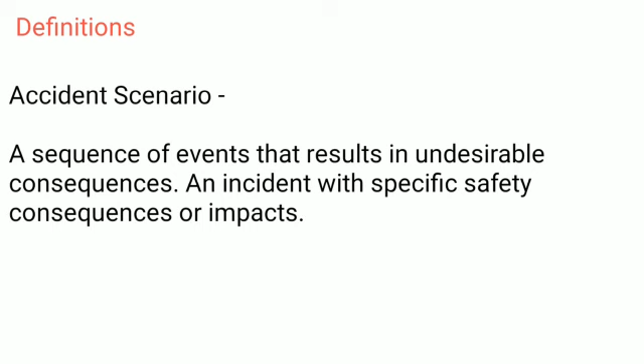Definitions. Accident scenario, a sequence of events that results in undesirable consequences. An incident with specific safety consequences or impacts. Administrative control, a procedural requirement for directing and/or checking engineered systems or human performance associated with plant operations.

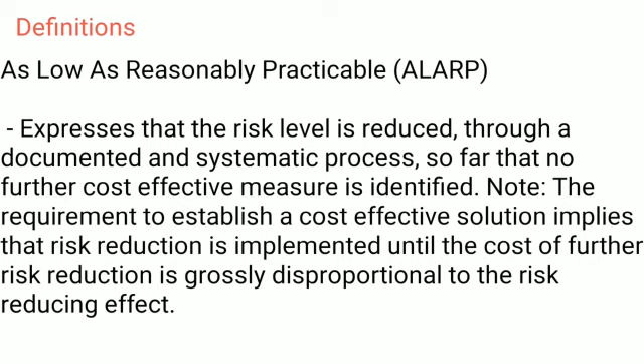As low as reasonably practicable, ALARP, expresses that the risk level is reduced, through a documented and systematic process, so far that no further cost-effective measure is identified. Note, the requirement to establish a cost-effective solution implies that risk reduction is implemented until the cost of further risk reduction is grossly disproportional to the risk-reducing effect.

Best practice. In the context of these guidelines, best practice refers to standards, procedures for controlling risk above the level provided by the application of good practice. Consequence. The direct, undesirable result of an accident scenario usually involving a fire, explosion, or release of toxic material. Consequence descriptions may be qualitative or quantitative estimates of the effects of an accident in terms of factors such as harm to people, economic loss, and equipment damage.

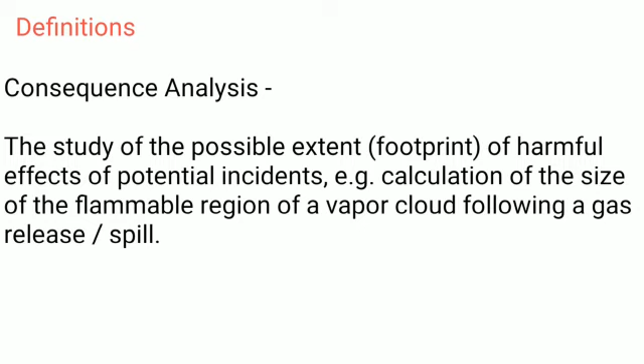Consequence analysis, the study of the possible extent, footprint, of harmful effects of potential incidents. For example, calculation of the size of the flammable region of a vapor cloud following a gas release, spill. Event, an occurrence related to equipment performance or human action, or an occurrence external to the system that causes system upset. In this document, an event is either the cause of or a contributor to an incident or accident, or is a response to an accident's initiating event.

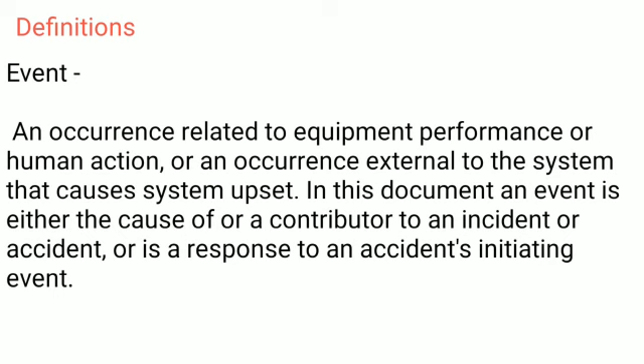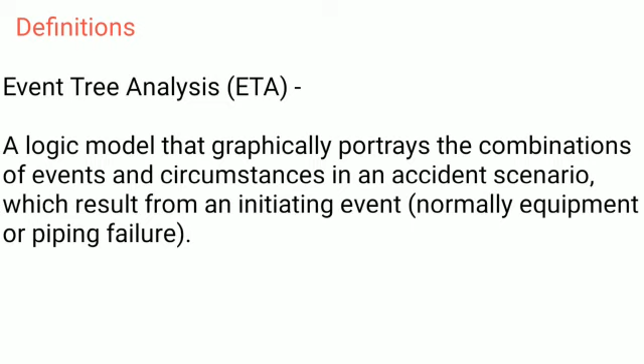Event tree analysis, ETA. A logic model that graphically portrays the combinations of events and circumstances in an accident scenario, which result from an initiating event, normally equipment or piping failure. External event, event external to the system, plant caused by 1. A natural hazard such as earthquake, flood, tornado, extreme temperature, lightning, etc., or 2. A human-induced event such as aircraft crash, missile, nearby industrial activity, fire, sabotage, etc.

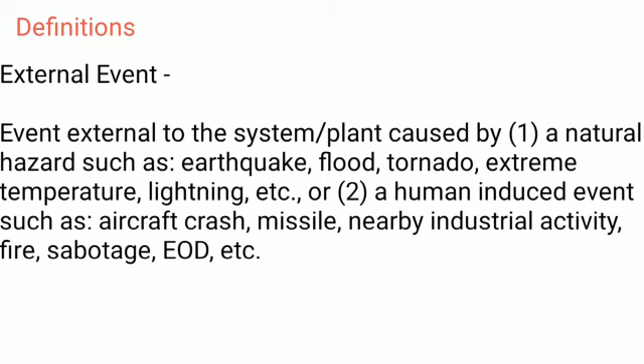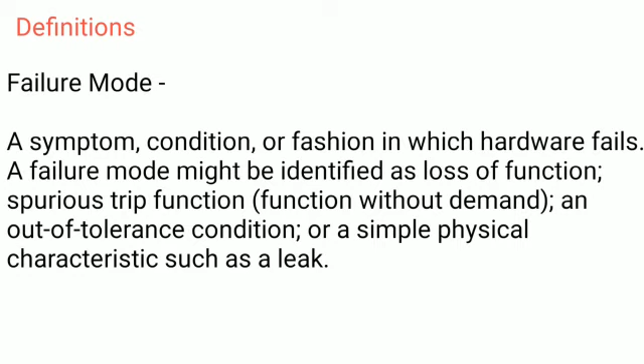Failure mode, a symptom, condition, or fashion in which hardware fails. A failure mode might be identified as loss of function, spurious trip function, function without demand, an out-of-tolerance condition, or a simple physical characteristic such as a leak. Failure modes and effects analysis, FMEA, a systematic, tabular method for evaluating and documenting the causes and effects of known types of component failures.

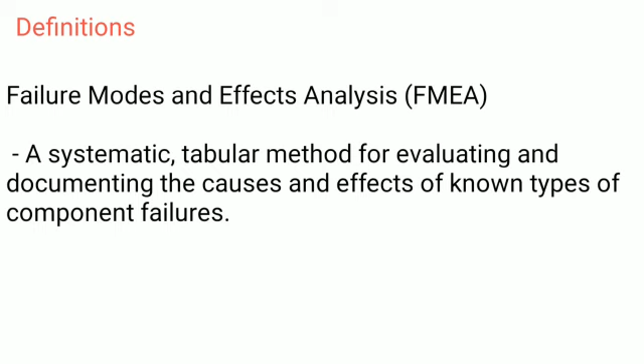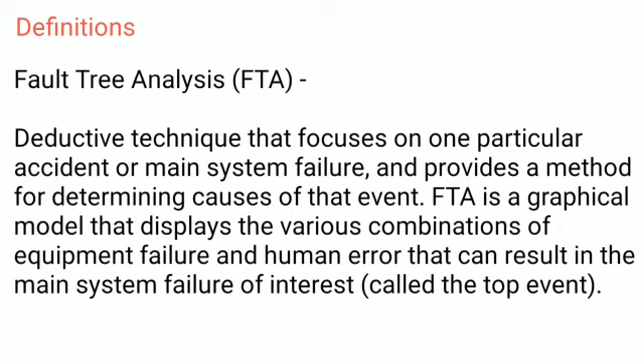Fault tree analysis, FTA, deductive technique that focuses on one particular accident or main system failure, and provides a method for determining causes of that event. FTA is a graphical model that displays the various combinations of equipment failure and human error that can result in the main system failure of interest, called the top event. Frequency, the number of occurrences per unit time, usually a year, at which observed events occur or are predicted to occur.

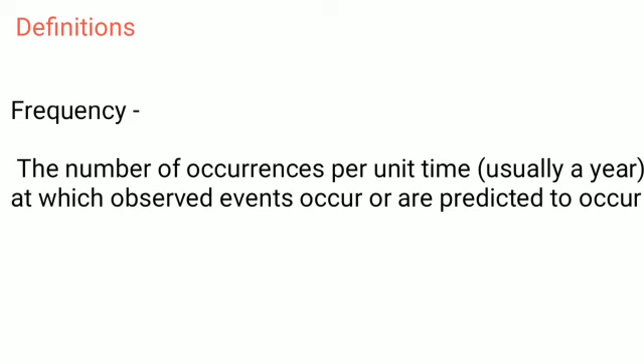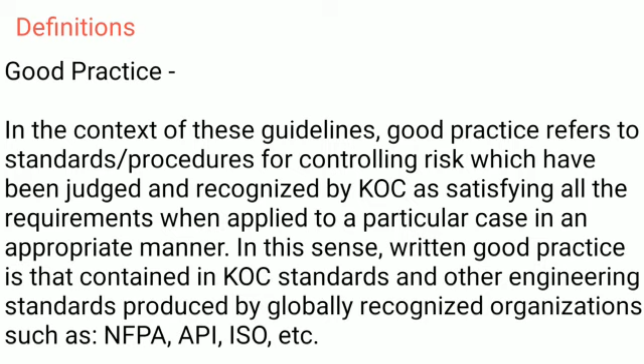Good practice, in the context of these guidelines, good practice refers to standards, procedures for controlling risk which have been judged and recognized by KOC as satisfying all the requirements when applied to a particular case in an appropriate manner. In this sense, written good practice is that contained in KOC standards and other engineering standards produced by globally recognized organizations such as NFPA, API, ISO, etc. Harm, physical injury or damage to health, property or the environment. Hazard, an inherent physical or chemical characteristic that has the potential for causing harm to people, property, or the environment.

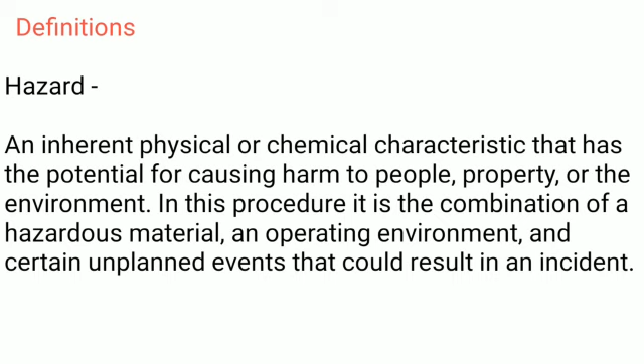In this procedure, it is the combination of a hazardous material, an operating environment, and certain unplanned events that could result in an incident. Hazard identification, the pinpointing of material, system, process, and plant characteristics that can produce undesirable consequences through the occurrence of an accident.

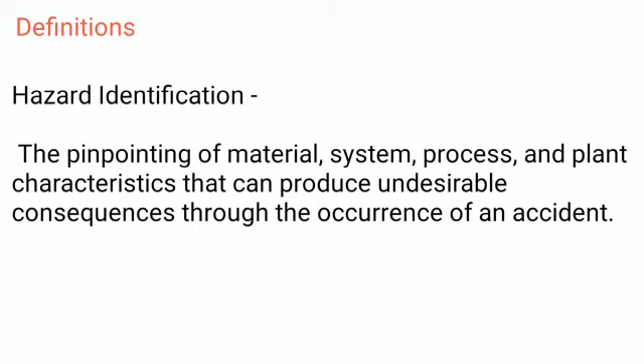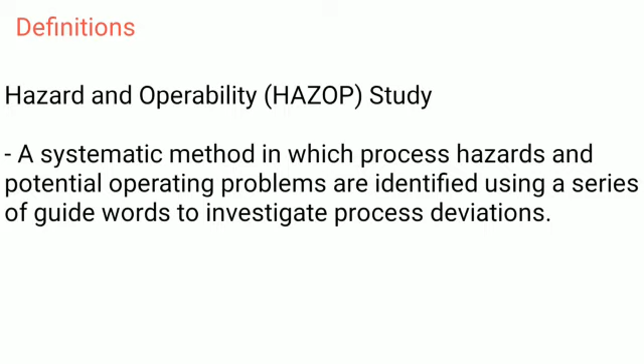Hazard and operability, HAZOP, study, a systematic method in which process hazards and potential operating problems are identified using a series of guide words to investigate process deviations. Hazard checklist, an experience-based list of hazards, potential accident situations, or other process safety concerns used to stimulate the identification of hazardous situations for a process or operation.

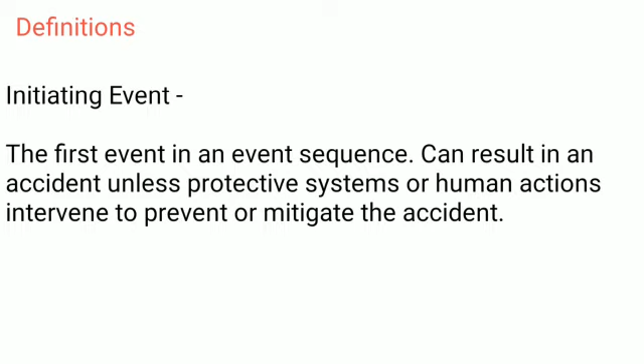Initiating event, the first event in an event sequence, can result in an accident unless protective systems or human actions intervene to prevent or mitigate the accident. Likelihood, a measure of the expected probability or frequency of an event's occurrence. Process hazard analysis, PHA, the analysis of the significance of hazardous situations associated with a process or activity. Uses qualitative and quantitative techniques to pinpoint weaknesses in the design and operation of facilities that could lead to accidents.

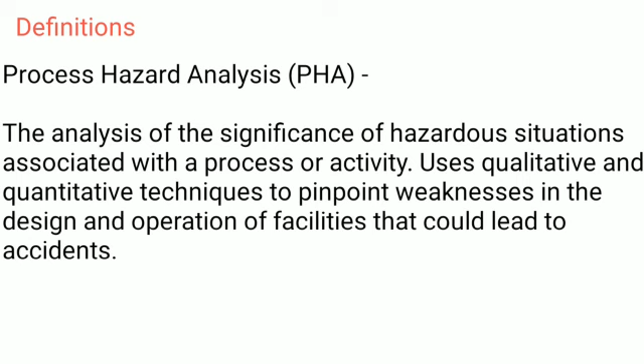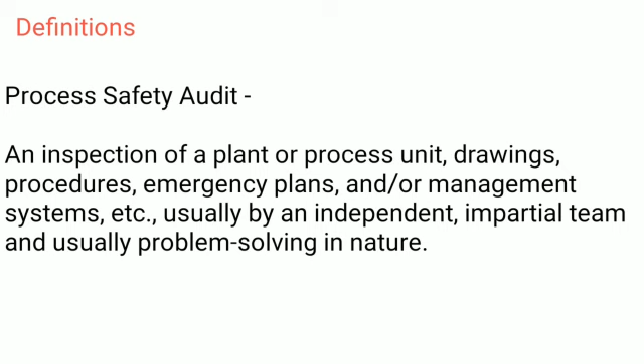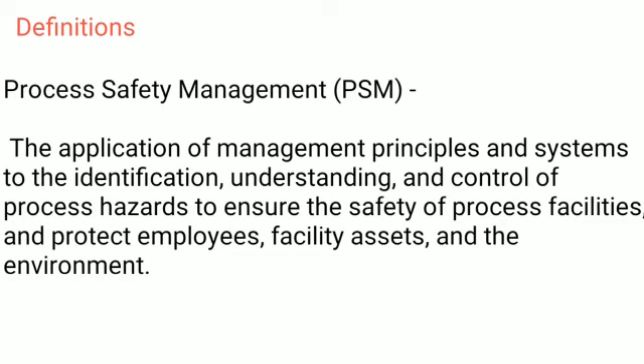Process safety audit, an inspection of a plant or a process unit, drawings, procedures, emergency plans, and/or management systems, etc., usually by an independent, impartial team and usually problem-solving in nature. Process safety management, PSM, the application of management principles and systems to the identification, understanding, and control of process hazards to ensure the safety of process facilities, and protect employees, facility assets, and the environment.

Quantitative risk assessment, QRA, the process of hazard identification, followed by numerical evaluation of consequences and frequencies, and their combination into an overall measure of risk. QRA is based on the application of engineering evaluation and mathematical techniques, ordinarily applied to accident scenarios, and is related to probabilistic risk assessment, PRA, used in the nuclear industry.

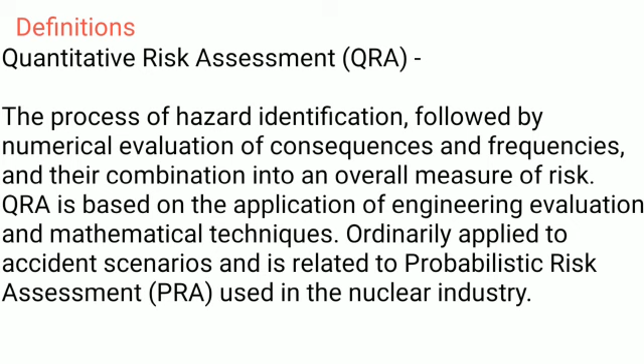Residual risk, the risk remaining after controls have been applied to associated hazards that have been identified, quantified to the maximum practicable, analyzed, communicated to the proper level of management and tolerated after proper evaluation. Risk, the risk associated with an event is defined as the product of the likelihood of the event and the magnitude, severity, of the outcome of that event.

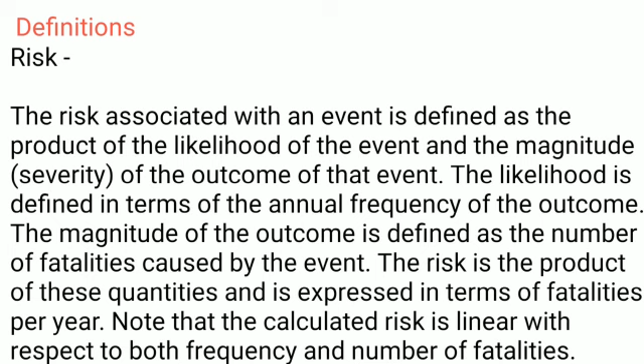The likelihood is defined in terms of the annual frequency of the outcome. The magnitude of the outcome is defined as the number of fatalities caused by the event. The risk is the product of these quantities and is expressed in terms of fatalities per year. Note that the calculated risk is linear with respect to both frequency and number of fatalities.

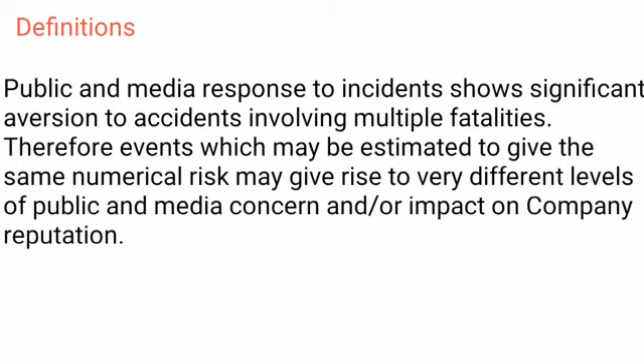Public and media response to incidents shows significant aversion to accidents involving multiple fatalities. Therefore, events which may be estimated to give the same numerical risk may give rise to very different levels of public and media concern and/or impact on company reputation. There are several risk measures which are defined below.

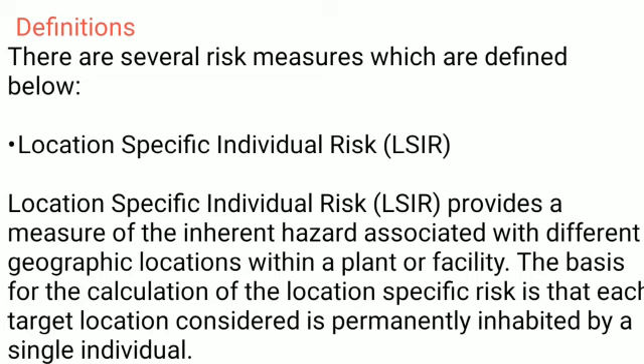Location-specific individual risk, LSIR, provides a measure of the inherent hazard associated with different geographic locations within a plant or facility. The basis for the calculation of the location-specific risk is that each target location considered is permanently inhabited by a single individual. The LSIR is evaluated, typically, at points on an orthogonal grid covering the area of interest. The calculated risks are typically presented as iso-risk contours, which provide an easily understood graphical presentation of the risks.

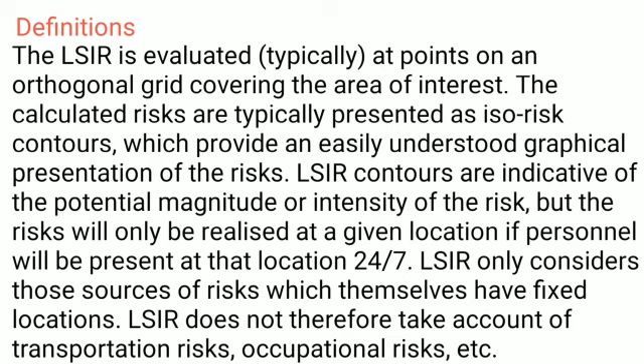LSIR contours are indicative of the potential magnitude or intensity of the risk, but the risks will only be realized at a given location if personnel will be present at that location 24/7. LSIR only considers those sources of risks which themselves have fixed locations. LSIR does not therefore take account of transportation risks, occupational risks, etc.

Individual risk, IR or IRPA. Individual risk, IR or IRPA, is determined on a case-by-case basis for each individual working on a plant or facility. In practice, there is insufficient definition in the data which defines the durations for which people will be exposed and locations at which they will be exposed. Calculations are therefore undertaken for representative work groups rather than for every individual.

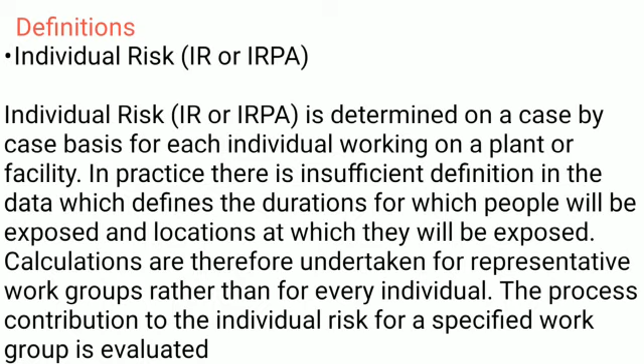The process contribution to the individual risk for a specified work group is evaluated as the time-weighted average of the LSIR values determined at each of the locations at which the work group will spend time. Risk contributions due to transport and occupational risk are also accounted for. Where personnel remain on the plant during their off-shift, risk contributions for this period are also taken into account.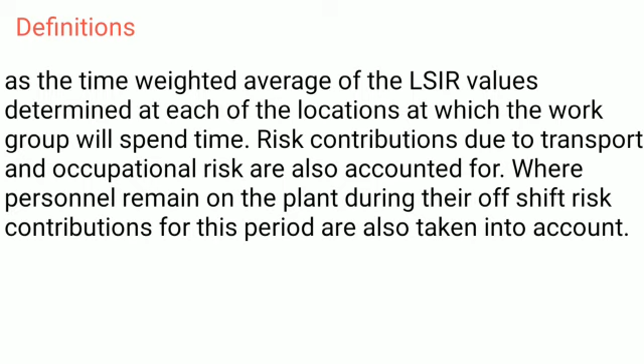Potential loss of life, PLL. Potential loss of life, PLL, is derived from the work group's IR estimates. The PLL for each work group is the product of the work group IR and the number of members of the work group. Where both day and night shifts will be utilized, both will contribute to PLL. Rotations are also accounted for. PLL can be evaluated in terms of fatalities per year, but may also be expressed in terms of total fatalities over the design life of the facility.

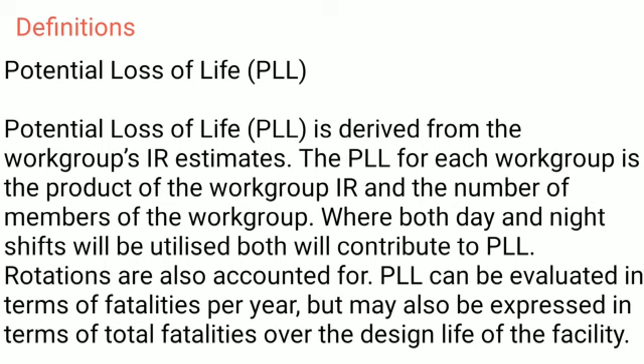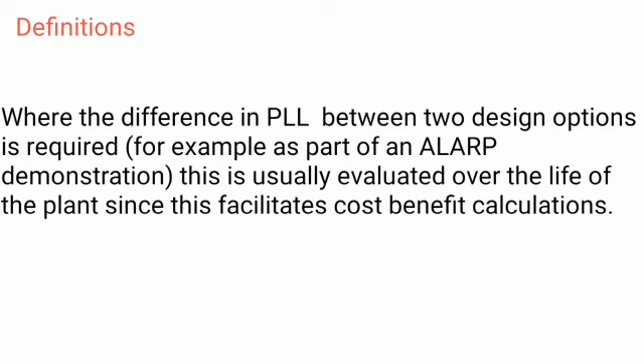Where the difference in PLL between two design options is required, for example as part of an ALARP demonstration, this is usually evaluated over the life of the plant since this facilitates cost-benefit calculations.

Cumulative frequency versus number of fatalities, FN. Cumulative frequency versus number of fatalities, FN, also called societal risk, is an FN plot that plots the cumulative frequency, F, of events resulting in N or more fatalities against N. Because of the way the plot is defined, the maximum value of F corresponds to the smallest value of N and vice versa. F therefore plots as a decreasing function of N.

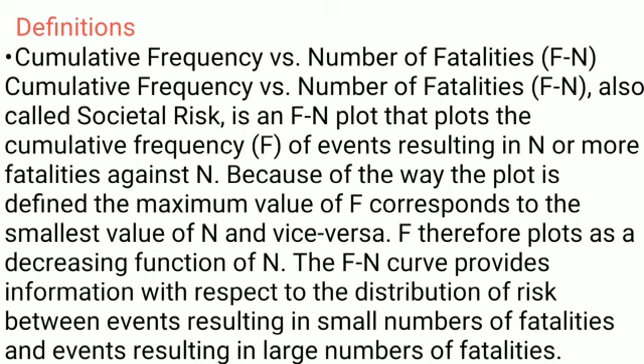The FN curve provides information with respect to the distribution of risk between events resulting in small numbers of fatalities and events resulting in large numbers of fatalities. Risk assessment, overall process of risk analysis and risk evaluation, which consists of deciding whether or not the risk is tolerable. Risk control, process of decision-making for managing and/or reducing risk, its implementation, enforcement and re-evaluation from time to time, using the results of risk assessment as one input.

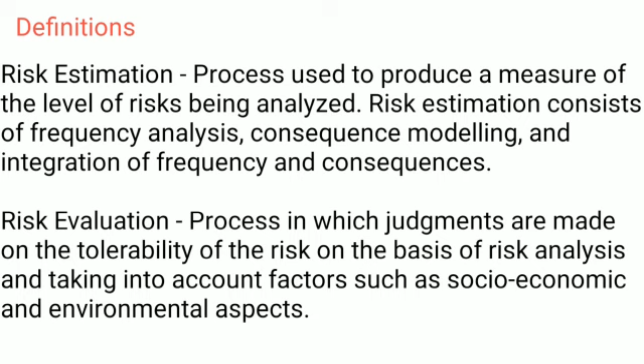Risk estimation, process used to produce a measure of the level of risks being analyzed. Risk estimation consists of frequency analysis, consequence modeling, and integration of frequency and consequences. Risk evaluation, process in which judgments are made on the tolerability of the risk on the basis of risk analysis and taking into account factors such as socioeconomic and environmental aspects. Risk management, the systematic application of management policies, procedures and practices to the tasks of analyzing, evaluating and controlling safety risk in order to protect employees, the general public, and company assets.

Risk measures, ways of combining and expressing information on likelihood with the magnitude of loss or injury, for example, risk indexes, individual risk measures, and societal risk measures. Risk reduction measure, a specific hardware, software system, or administrative control designed to maintain a process within safe operating limits, to safely shut it down in the event of a process upset, or to reduce human exposure to the effects of an upset.

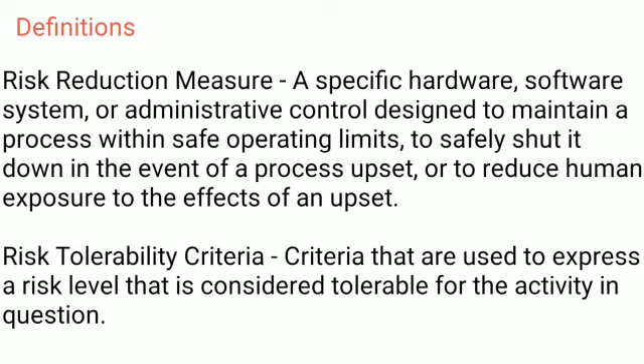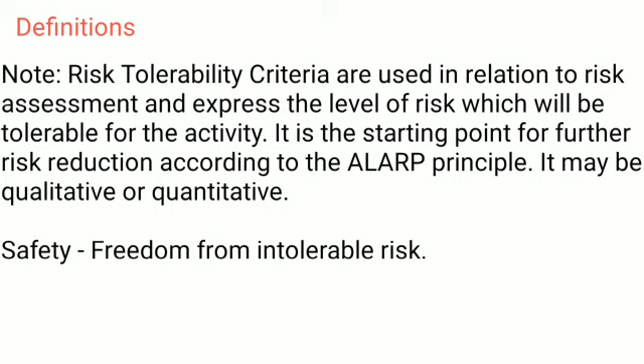Risk tolerability criteria, criteria that are used to express a risk level that is considered tolerable for the activity in question. Note: risk tolerability criteria are used in relation to risk assessment and express the level of risk which will be tolerable for the activity. It is the starting point for further risk reduction according to the ALARP principle. It may be qualitative or quantitative. Safety, freedom from intolerable risk.

Societal risk, the relationship between frequency and the number of people suffering from a specified level of harm in a given population from the realization of specified hazards. Tolerable risk, risk that has been reduced to a level that can be endured by KOC. Worst case scenario, a conservative, high, estimate of the consequences of the most severe accident scenario identified.

Risk assessment and management process. The KOC is composed of 13 elements. Risk assessment, compliance and management is element 3 of the KOC, and it clearly supports the implementation of element 4, facilities, design and construction, element 5, operations and maintenance, element 6, management of change, and element 7, crisis preparedness and management. Other elements in the system either require input from risk assessment and management, or they rely on this element to help define and clarify their management aims.

The relationships noted above support an integrated system for managing risks throughout the entire life cycle of KOC facilities and activities. Consequently, the risk assessment and management process is essential to the objectives of the KOC HSE management system as a whole. The primary objectives of the risk assessment and management process are to identify and rank the risks so that they can be adequately assessed and managed, and to examine associated risk reduction measures to determine those most suitable for implementation. In this context, the main role of the risk assessment and management process is to assist KOC management in providing a demonstration that all hazards have been identified, all risks have been evaluated, and adequate measures have been, or will be, taken to control the risks to a tolerable and ALARP level.

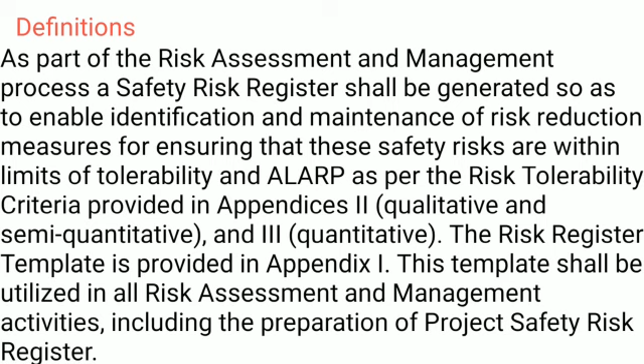As part of the risk assessment and management process, a safety risk register shall be generated so as to enable identification and maintenance of risk reduction measures for ensuring that these safety risks are within limits of tolerability and ALARP as per the risk tolerability criteria provided in Appendices 2, qualitative and semi-quantitative, and 3, quantitative. The risk register template is provided in Appendix I. This template shall be utilized in all risk assessment and management activities, including the preparation of Project Safety Risk Register.

Risk assessment and management approaches. Risk assessment and management process shall be used to provide an input into the decision-making process. This will enable the company's management to provide reasoned and supported arguments to demonstrate that there is nothing else that could reasonably be done to reduce risks further.

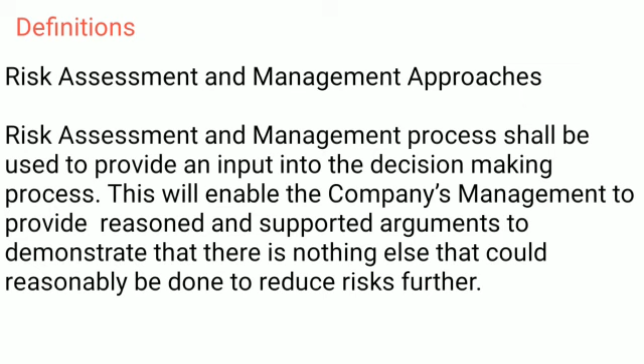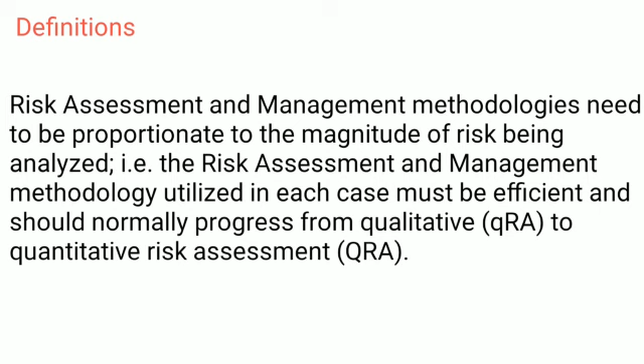As expressed in figure number 1 below, risk assessment and management methodologies need to be proportionate to the magnitude of risk being analyzed, that is, the risk assessment and management methodology utilized in each case must be efficient and should normally progress from qualitative to quantitative risk assessment, QRA. The lower levels of assessment, QRA and SQRA, are considered most appropriate for hazard screening.

The usual approach to deciding the appropriate level of risk assessment and management detail would be to start with a qualitative approach and to elect for more detail whenever it becomes clear that the current level of detail is unable to allow for a clear understanding and assessment of the risks. However, to save time and budget, and yet achieving high-quality results, a highly competent and experienced risk assessment and management specialist may decide to start the process with SQ or QRA to make the process more efficient.

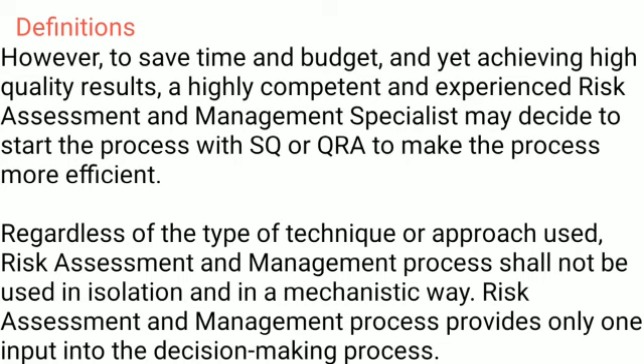Regardless of the type of technique or approach used, risk assessment and management process shall not be used in isolation and in a mechanistic way. Risk assessment and management process provides only one input into the decision-making process. Description of the risk assessment and management process. Figure number 3 below summarizes the main stages in the process of risk assessment and management. As it can be seen, risk assessment and management involves a series of steps as follows.

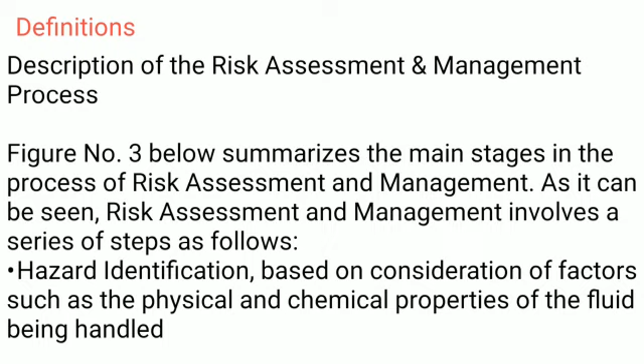Hazard identification, based on consideration of factors such as the physical and chemical properties of the fluid being handled. Risk assessment, from the hazards and consideration of its tolerability to personnel. Risk management, consisting of reducing risks where this is deemed to be necessary. This involves identifying opportunities to reduce the frequency and/or consequence of an accident.

It is clear then that the main purpose of risk assessment and management process is to identify and rank the risks so that they can be adequately managed. Each stage in the process can be seen as an opportunity to identify potential risk reduction options. The following sections present a description of each stage of the risk assessment and management process.

The risk assessment and management process shall be carried out either utilizing internal resources or through an external agency, who have knowledge and experience in the day-to-day running of the plants, operations and facilities. Typically, a review team for hazard identification and risk assessment may include personnel from various backgrounds as required, for example team leader, senior engineers, operations, maintenance supervisors, process engineers, HSE personnel and inspection and corrosion engineers.

Hazard identification. One key element of effective safety risk management is a systematic approach to hazard identification. The hazard identification methodology applied shall consider all the factors involved in the system under study. This shall include all modes of operation, routine and non-routine activities, emergencies, as well as external hazards. For application, methodologies, etc. related to hazard identification, the reader is referred to SIMS Guidelines KOC.SA.034 for safety hazard identification.

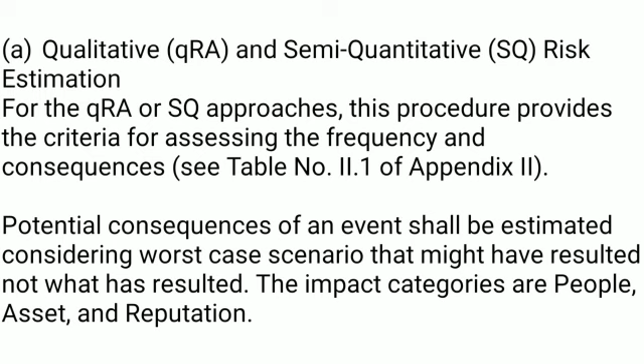For the qRA or SQ approaches, this procedure provides the criteria for assessing the frequency and consequences, see Table No. 2.1 of Appendix 2. Potential consequences of an event shall be estimated considering worst-case scenario that might have resulted, not what has resulted. The impact categories are people, asset, and reputation. The frequency of occurrence of the worst-case scenario identified during severity assessment must be determined. This initial likelihood is determined after taking into consideration the existing control measures in place to prevent occurrence of the hazardous event, that is the event which is manifestation of the hazard, as well as control measures in place to mitigate the severity of the consequences.

Once the frequency and consequences are determined, the risk must be estimated using the safety risk evaluation matrix shown in Figure 2.1 of Appendix 2. B. Qualitative and semi-quantitative, SQRA, risk assessment. The results of the risk estimated as established above shall be compared to the KOC risk tolerability criteria, RTC, also given in the safety risk evaluation matrix shown in Figure 2.1 of Appendix 2. The risk then shall be managed accordingly. This process is called risk assessment, which refers to the process of objectively examining the risks involved in a particular activity. The objective of the determination is to ensure that the risks are fully understood.

In the case of the qualitative and semi-quantitative, SQRA, approaches, the tolerability or otherwise of an identified risk and any associated risk-reducing measures are determined on the basis of the collective judgment of the risk assessment team and KOC current standards. In these cases, the assessment shall be performed using the Safety Risk Evaluation Matrix shown in Figure 2.1 of Appendix 2.

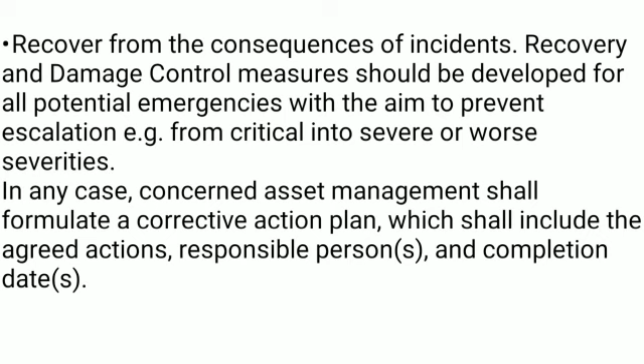Recover from the consequences of incidents. Recovery and damage control measures should be developed for all potential emergencies with the aim to prevent escalation, for example from critical into severe or worse severities. In any case, concerned asset management shall formulate a corrective action plan, which shall include the agreed actions, responsible persons, and completion dates.

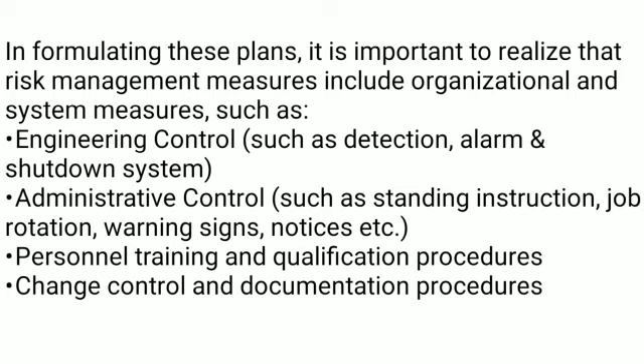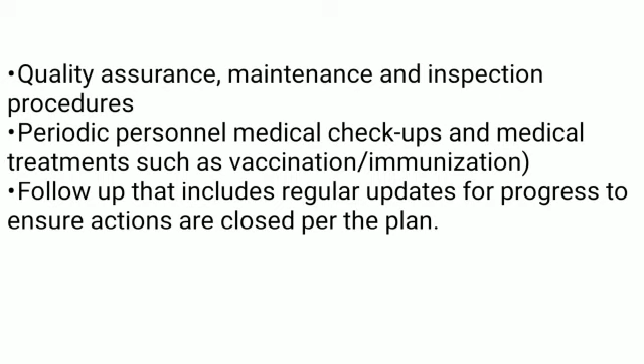In formulating these plans, it is important to realize that risk management measures include organizational and system measures, such as engineering control, such as detection, alarm and shutdown systems; administrative control, such as standing instructions, job rotation, warning signs, notices etc. Personnel training and qualification procedures. Change control and documentation procedures. Quality assurance, maintenance and inspection procedures. Periodic personnel medical checkups and medical treatments such as vaccination, immunization. Follow-up that includes regular updates for progress to ensure actions are closed per the plan.

Risk monitoring. The responsibility for implementation of additional control measures as well as maintenance of existing control measures must be specified. Responsibility must be assigned to a specific designation. Where additional controls are in the form of a program requiring time and resources for completion, the target date for completion must also be specified.

Documentation. The key information and the decisions made in the risk assessment and management process shall be fully documented in an ordered and comprehensive manner.

The documentation shall register the various decisions made during the process as well as the basis for those decisions. This documentation shall be reflected in a risk assessment and management report. This report shall be written in an understandable manner to all personnel involved in the decision-making process.

As a minimum, it shall include objectives, scope and limitations, a description of the system under study, assumptions and premises, main contributors to the risk, sensitivity analysis if required, conclusions from the study, and risk reduction measures recommended. The risk assessment and management report shall be approved by the asset management.

The asset management in turn shall prepare an implementation plan for the risk reduction measures agreed and a follow-up plan, which will be included in the HSE Group audit program. On the other hand, the results of risk assessment and management studies and activities shall also be recorded in the Safety Risk Register, SRR. Additional information on the management of the Safety Risk Register, as well as the SRR template, KOC.033, are provided in Appendix I.

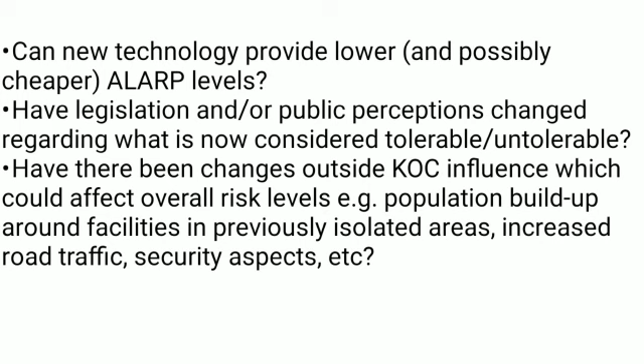Have there been changes outside KOC influence which could affect overall risk levels, for example population buildup around facilities in previously isolated areas, increased road traffic, security aspects, etc.? Specifically, those issues which are managed at ALARP risk level but still remain toward the upper end of the ALARP region shall be reviewed on a minimum frequency of once a year.

Verification of risk assessment and management studies shall be performed by Assets Directorate's HSE team's competent personnel, and as a minimum the following aspects shall be verified in this process. The risk assessment and management study is adequately scoped in accordance with the needs and objectives. The study has thoroughly followed the process established in this guide. The risk assessment and management assumptions and premises are credible.

On the other hand, the risk assessment and management process shall be systematically audited by HSE Group with the aim to achieve the following objectives. Ensure the effectiveness of the studies and their adherence to this guide. Ensure that risks are being properly managed.

Risk communication. Risk assessment and management activities and results are of limited value if not communicated properly to internal audiences and, where appropriate, external audiences. The internal audience is comprised of KOC employees and relevant contractors. Risk communication is an asset management responsibility, which should be fulfilled through ongoing communications to ensure that all personnel are aware of the risks, and changed risks, plus their roles and actions to be taken.

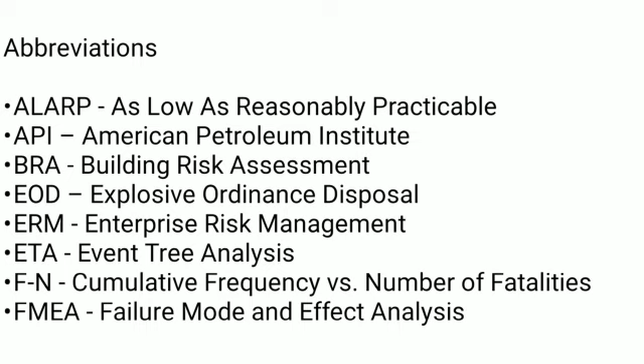The external audience includes the general public that can be impacted by assets operations and also appropriate regulatory agencies for emergency preparedness purposes. Abbreviations. ALARP, As Low As Reasonably Practicable. API, American Petroleum Institute. BRA, Building Risk Assessment. EOD, Explosive Ordnance Disposal. ERM, Enterprise Risk Management. ETA, Event Tree Analysis. FN, Cumulative Frequency versus Number of Fatalities. FMEA, Failure Mode and Effect Analysis.

FTA, Fault Tree Analysis. HAZID, Hazard Identification Study. HAZOP, Hazard and Operability Study. HSE, Health, Safety, and Environment. HSEMS, Health, Safety, and Environment Management System. IR, Individual Risk. ISO, International Organization for Standardization. JSA, Job Safety Analysis. KOC, Kuwait Oil Company. LOPA, Layers of Protection Analysis.